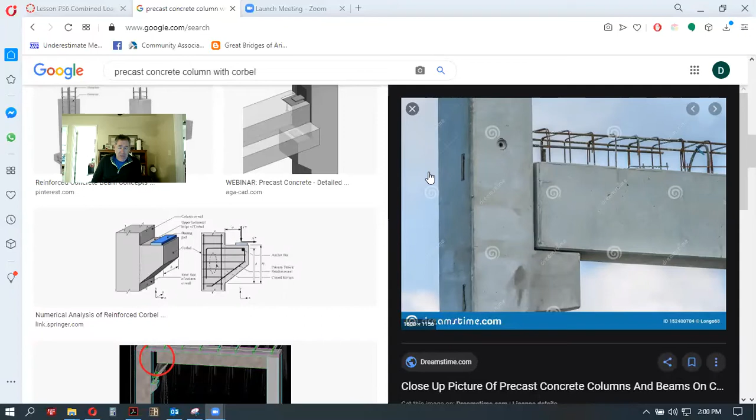But when you're talking about precast concrete, where you're making those columns and beams at a manufacturing yard or a fabrication yard, and then you're shipping them on site and assembling them a little bit like an erector set, in other ways very much like a steel frame construction project, then how do you do that is a fairly significantly different type of question. And typically it involves some sort of steel embed plates and some welding, but you don't typically get significant moment transfer.

And how do you temporarily support things while you're doing all those other kinds of details? So one of the answers that you have is to put a little ledge on the column so that you can then place the beam right on there. And that ledge is called a corbel. And because of that, there are some offsets that we have to deal with in terms of what happens inside the column, and we're going to explore that a little bit in this particular example. So let me kick over here to that example.

So in example PS 6.4, you've got on the top of the page the three-dimensional view of this column with this corbel, and then you've got that beam end that comes down and needs to have some sort of support force or reaction there. Of the variety of challenges that we have to deal with, this corbel could shear right down the column face, along that dashed line that you might be able to see. Or it also may want to rotate and try to pull away from the column, which is the more typical cracking that we begin to see with that particular kind of problem.

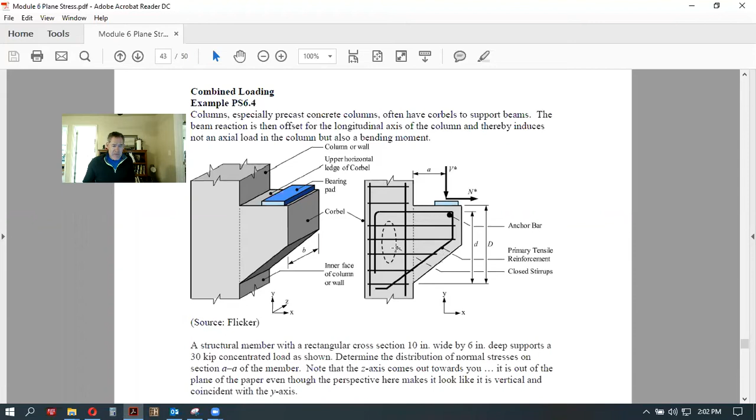To the point where what you do see some designers doing is taking reinforcement from the upper left and extending it down into the lower right into the corbel. All those dark lines you see represent the steel reinforcement. It is a particular challenge that we have to address in these precast systems. So we're not going to focus so much on the behavior of the corbel as we are the impact of having this reaction that is offset from the longitudinal or centroidal axis of the column itself. It's going to introduce bending into the column.

And we're going to just look at this from a stress basis as opposed to the design basis, which is what you would learn in the reinforced concrete design class. We have a very small column that is sized at 10" by 6". You don't see the 6" dimension in this particular image. That is the basic column cross section. That's very, very small. Even a 10" by 10" square column would be small from that perspective. So this is a little bit of an unusually small case. The 30 kip reaction is not unusually small, but the rest of it is somewhat small.

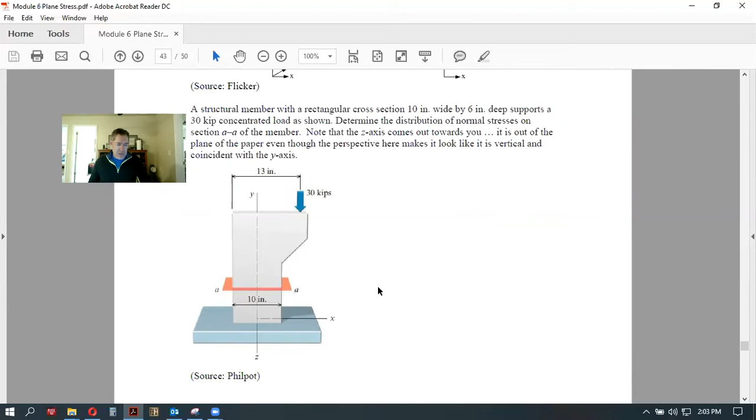And so we're going to look at this offset, eccentrically placed load and see what the stress effects are on the overall member. All right, so here we have a simple representation of our system. There's your 30 kip load, and our 10" by 6" cross section. And our goal is just to find what the stress variation is on the cross section.

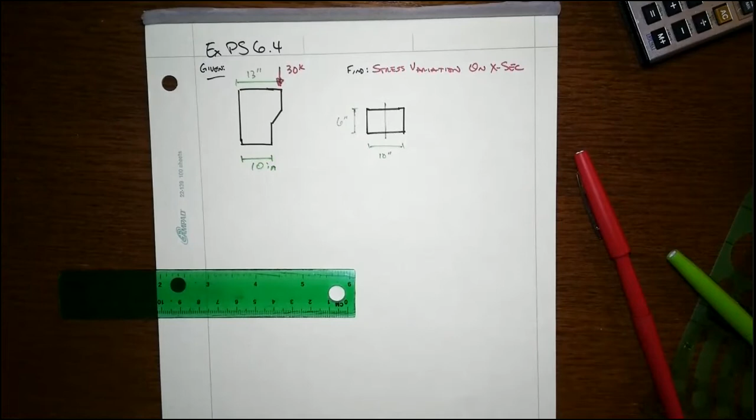So the first thing let's do is predict what we're going to need from a geometric properties standpoint. We know we've got an axial force that we're going to be dealing with, so we know we are going to need the cross-sectional area. That's of no surprise at all, and that's, of course, very easy: 10" by 6", or 60 square inches.

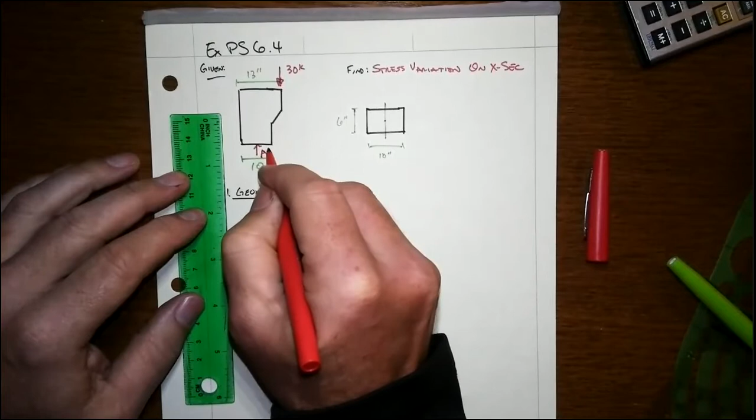No big deal there, right? What you might not as easily see is that we're going to end up with some sort of bending moment, right? And that can be more easily seen by, hey, the axial load is, of course, right here, acting effectively at the centroid. It's over here. That's going to be our axial load P, or actually maybe better said N. That's going to be really simple. That's going to be our 30 kips.

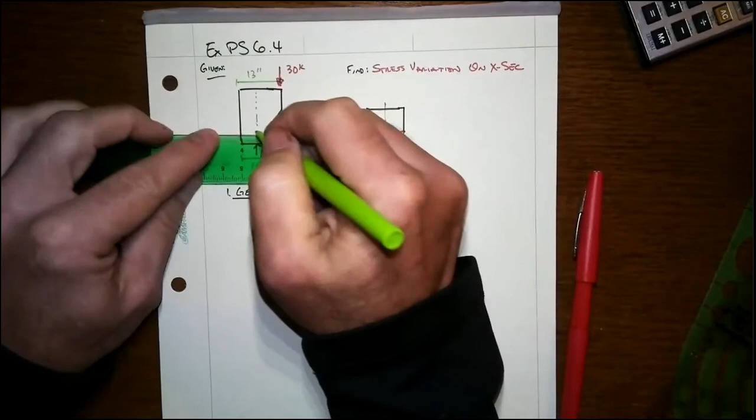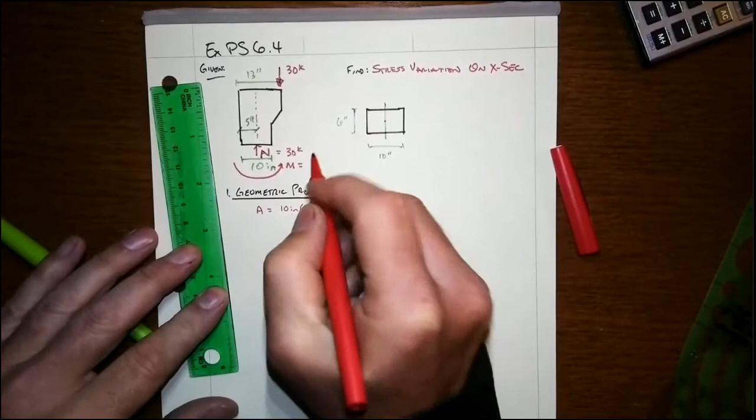But notice there's now a force couple at work here, right? So there is a distance of 5 inches over, right, from here to here. And so that's going to leave 8 inches over for that force couple, and we're going to need a restoring moment that is associated with that. And we might generically just write that as N times E, and we'll come back and put the number on that in just a second. But that's going to tell us that we do have bending.

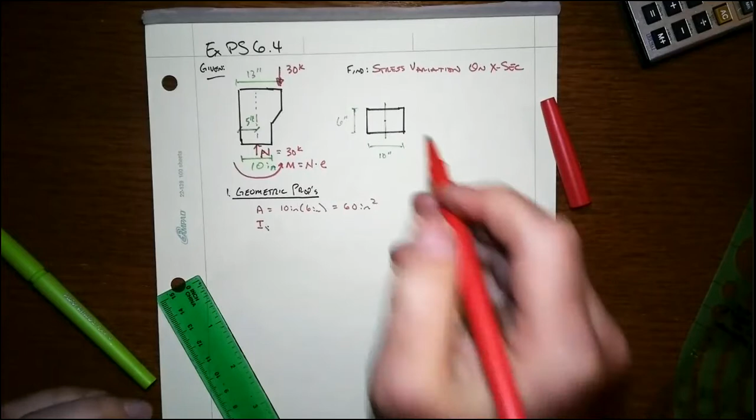We're going to need the second moment of area, and I attempted to call that XX. There's not really an XX-YY business in the model or the drawing that we've got here, but I think we do have it in the original drawing. This is the ZZ axis, YY actually is the longitudinal axis, and this I believe is the XX axis. So this would actually be IZZ, and it's just going to be our 1/12 BH cubed.

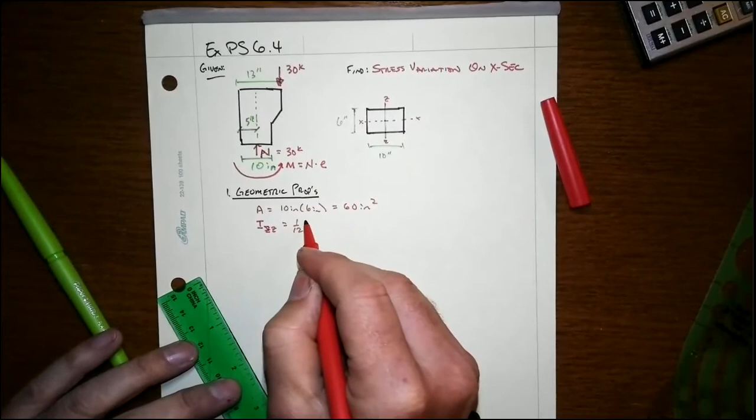And so the base here is this one, 6 inches, times the height, 10 inches cubed. Don't know why I changed the symbol for the units there, but 6 over 12 is a half. The 10 cubed is 1,000, so that's going to be 500 inches to the fourth for the I.

Okay, I bet we're going to want S, which is of course I over C, and so that would be 500 inches to the fourth divided by the C going to the outer fiber, which would be 5 inches, so that would be 100 inches cubed for the S, either direction.

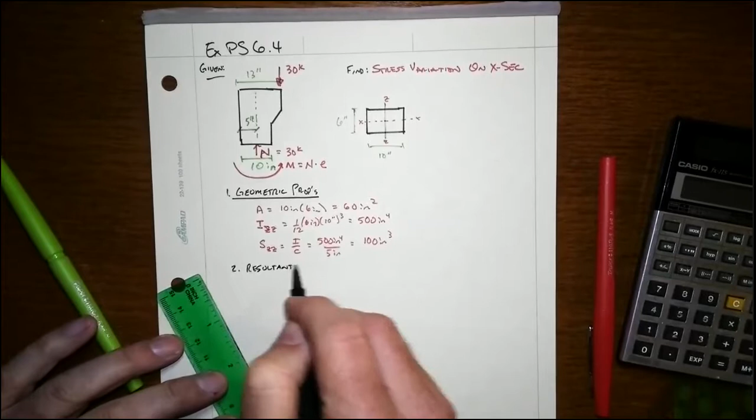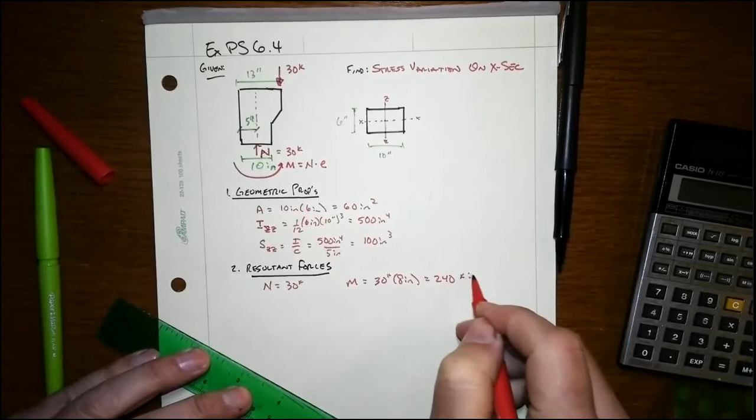All right, let's look at then the resultant forces. We've actually already found them. We already know the axial force, N equals 30 kips, and the bending moment is going to be 30 kips times our 8-inch eccentricity, or 240 kip inches.

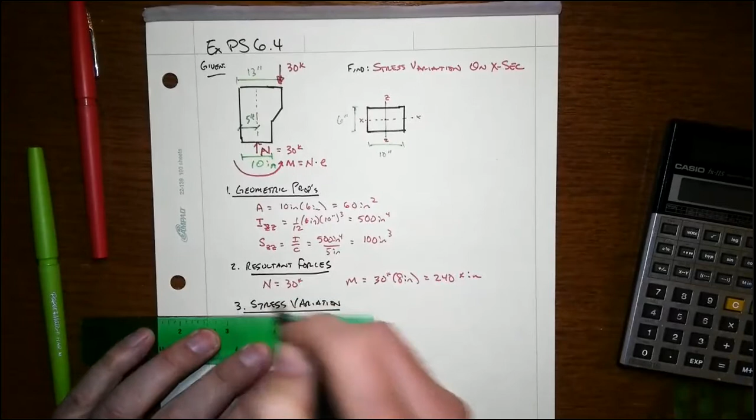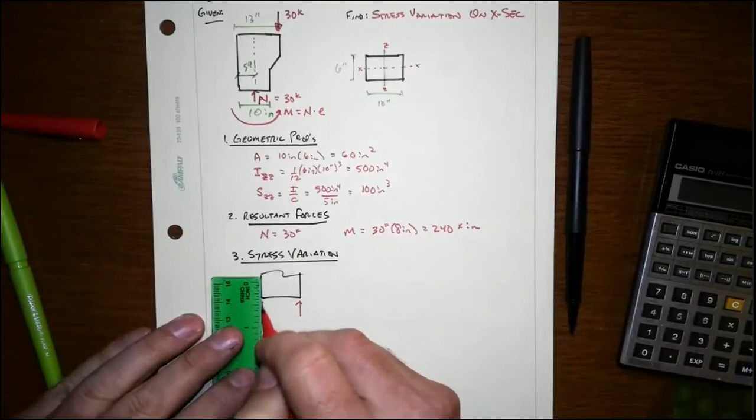All right, so now let's go find our stress variation. I always, when I do this, like to show the actual stress block, as in the stress model. Here's the bottom of the cross section, and the axial stress then is just going to be sigma equals N over A. And for us, that would be then our 30 kips divided by our 60 square inches, so it'll be pretty small. It's only 1/2 KSI. Now, that's not particularly very big.

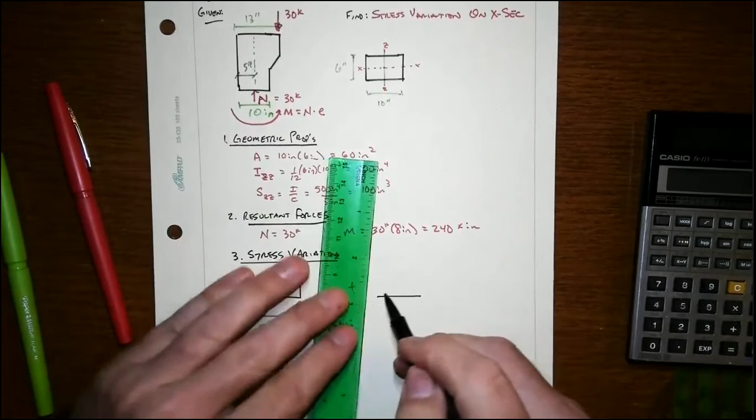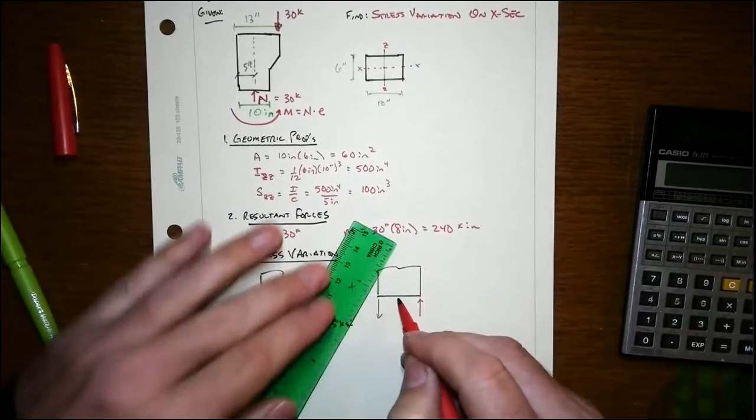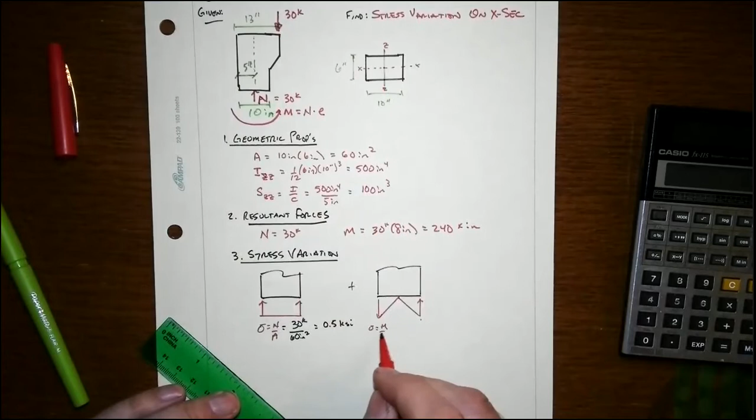It's all compression, right? And then we'll add to that normal stress the variation that comes from the bending. Right, now we're going to have compression, right? The arrow points to the compression side on the right. That means the other side will be tension, and it'll be 0 at the neutral axis. And the maximum here out at the outer fiber will be M over S. And so that would be our 240 kip inches divided by our 100 cubic inches.

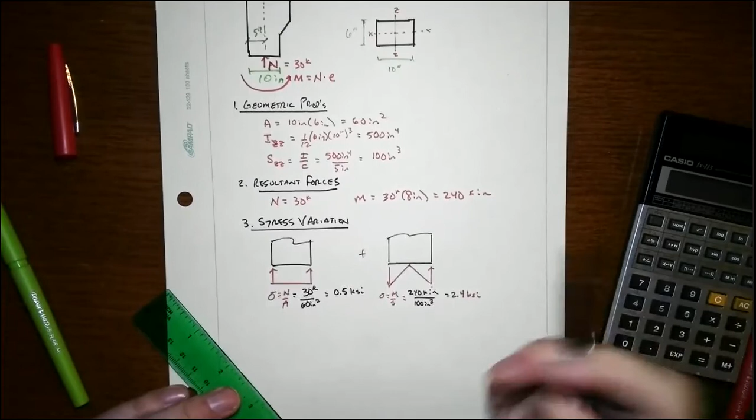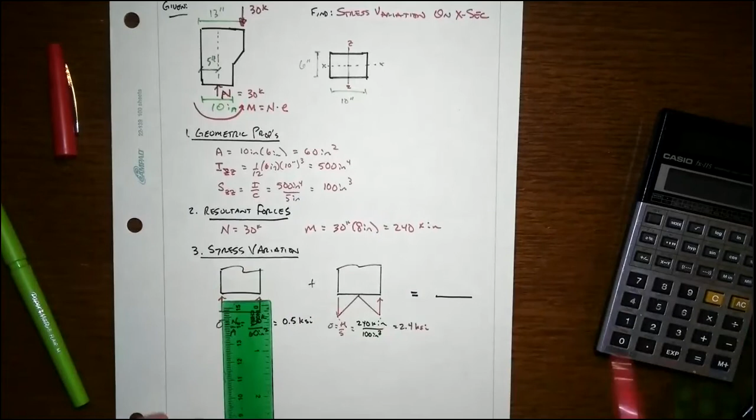Hey, I can do this one in my head. 240 divided by 100 is 2.4 KSI at those two outer edges. And so the net variation that we're going to have is just the sum of those two, right? We're going to have a 2.4 minus a half over here at the one side. Let's get the edge of the cross section there. And that'll be tension, right? So that will be a net of 1.9, 2.4 minus the half, right?

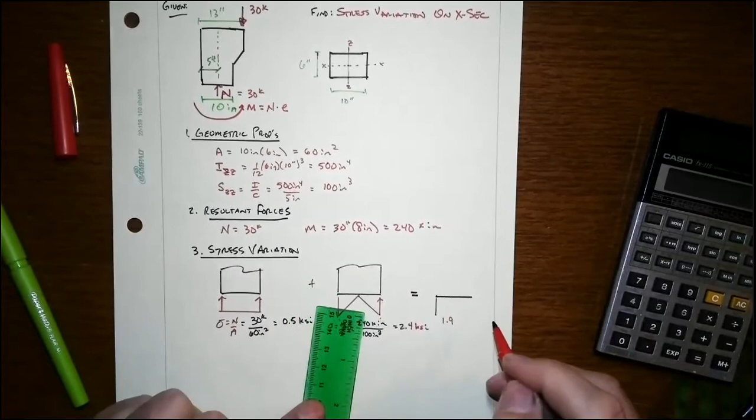And then on the other side, we'll add the two, so it's 2.4 plus 0.5, so 2.9. And it's just going to be a straight line variation in between those two. So the location of zero stress is actually shifted over a little bit. What we're really doing is superimposing this on top of that. This sets a new baseline for the sort of effective zero.

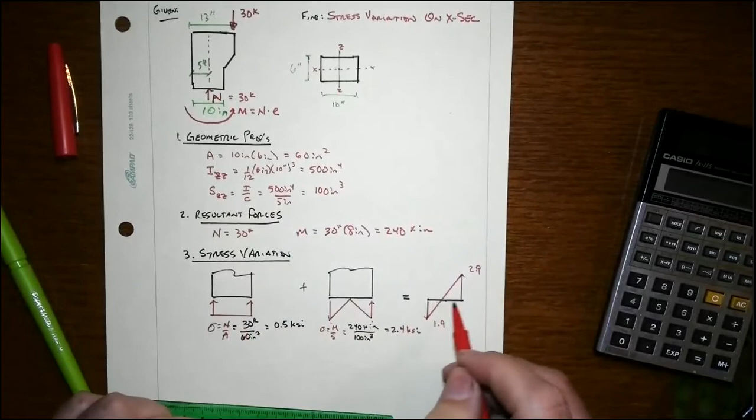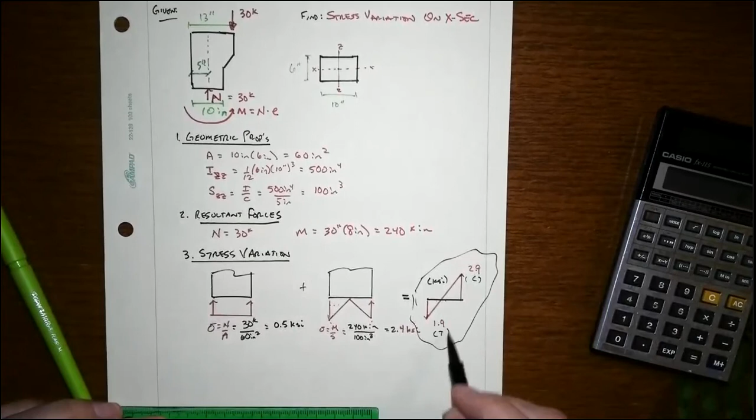And so it's sort of like taking this diagram and shifting it down a little bit, or really actually taking it the other way. That depends on what you call going the other way. But there's your net that you end up with here for your stress variation for the normal stresses, with a max normal stress of 2.9 KSI, that'd be compression, and max tensile normal stress of 1.9 KSI for the situation.